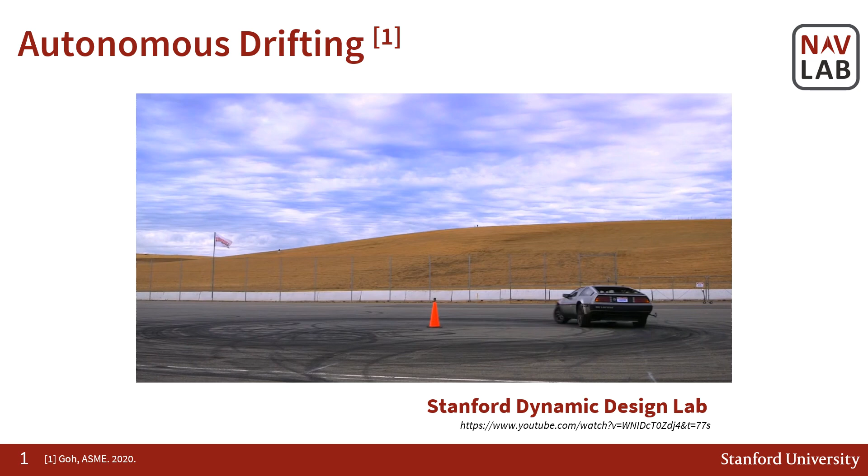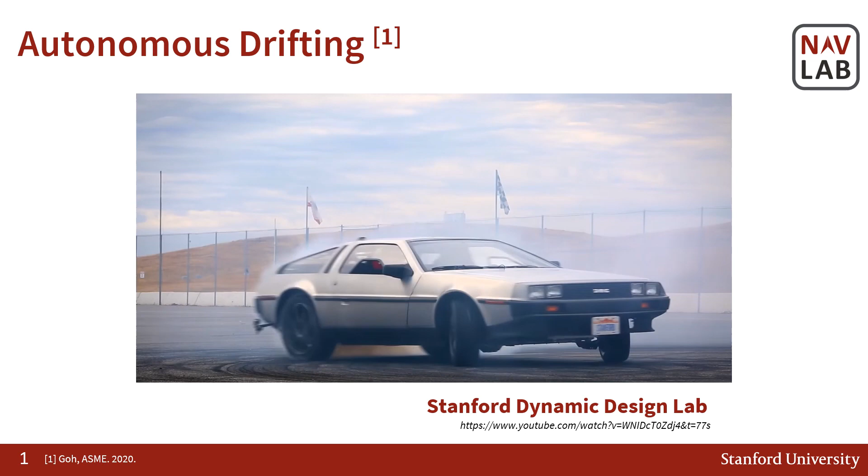Since I've mentioned autonomous drifting in the title of this work, let me start off by showing a demonstration of autonomous drifting. This demonstration was completed by our collaborators in the Stanford Dynamic Design Lab. The car is fully autonomous with a GPS receiver and IMU on board. While drifting is often considered only in the context of motorsports, it also lends itself to lessons in the larger context of autonomous driving.

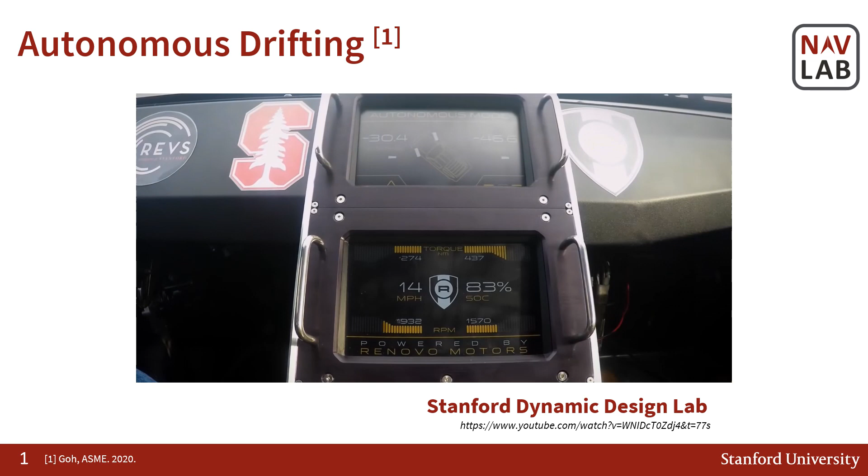Our overall goal is to ensure safety of autonomous vehicles under extreme dynamics. One such example of extreme dynamics is autonomous drifting. Drifting is a maneuver with extreme dynamics characterized by high side slip angles and slip of the rear tires. Sometimes it can accidentally occur in hazardous conditions, such as on wet or icy roads. Thus, studying autonomous drifting provides insights into safe navigation of autonomous vehicles in hazardous conditions that may compromise driver safety.

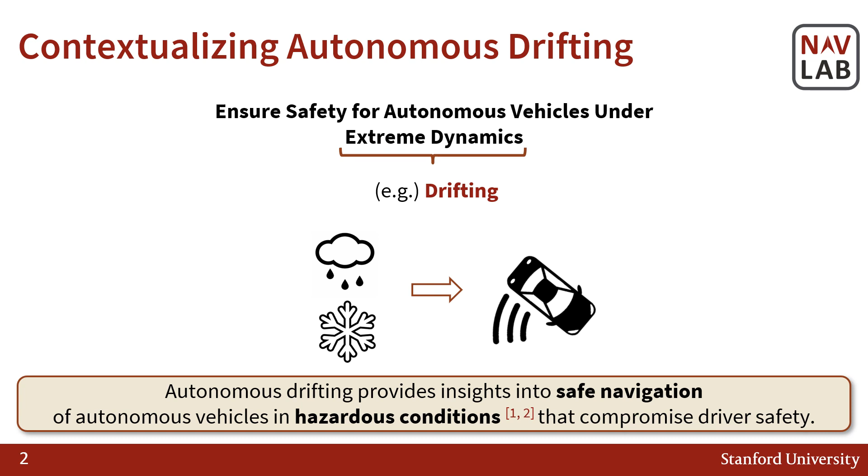This then leads us to our motivating question. In these safety-critical scenarios, where we might want to provide safety guarantees, from a navigation perspective, can we infer the worst-case estimation performance of our system under uncertainty? Now, what are the sources of uncertainty that we may be concerned about in autonomous drifting?

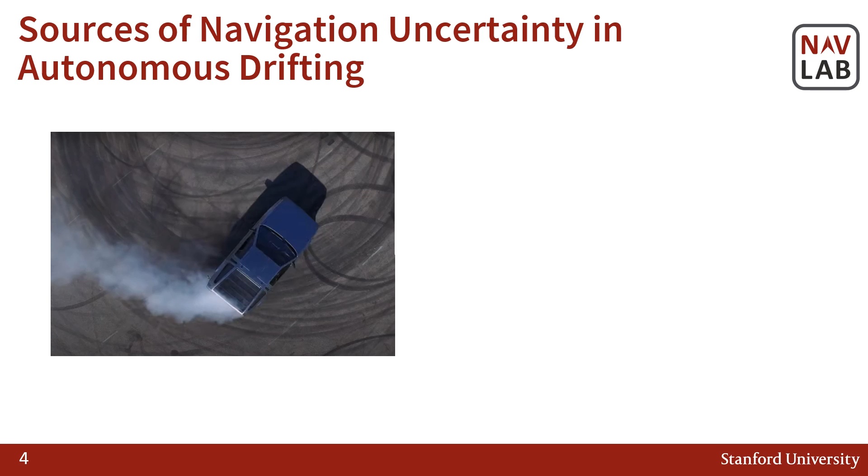To illustrate the sources of uncertainty that may arise in drifting, let us revisit our drifting demonstration. The car is equipped with a GPS receiver and IMU, which are subject to measurement uncertainties. Some common factors that contribute to measurement uncertainty are listed here. First, measurements are subject to noise from some unknown underlying probabilistic distribution. Second, we may experience communication losses. For example, the GPS receiver may lose connection with a base station, thereby causing losses in the base station corrections. And finally, the measurements may be subject to outliers or biases from environmental factors.

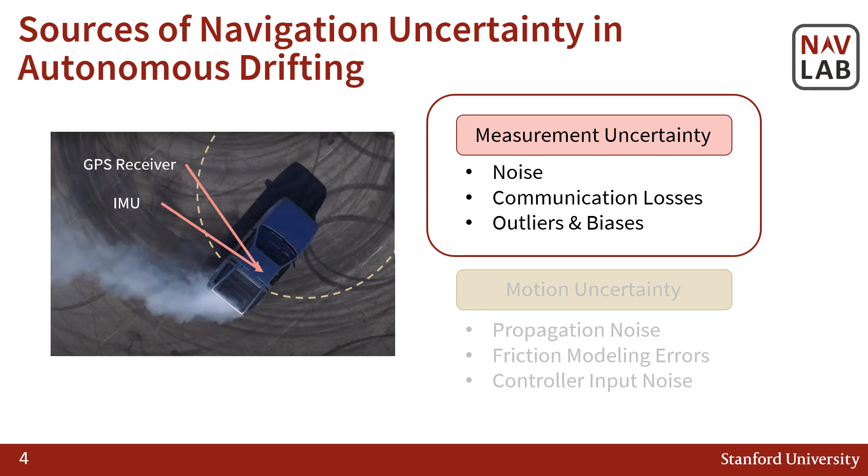In addition to measurement uncertainty, we're also concerned about motion uncertainty. As with all dynamic systems, drifting is subject to propagation noises. We also might be concerned with the modeling of the friction parameter between the tire and the road, as changes in this parameter change how we believe the car will move. And finally, there may be controller input noises. For this work, we focus on measurement uncertainty, specifically the uncertainty in double difference GPS pseudo-range measurements.

Now that I have framed the source of uncertainty we are concerned about, in safety-critical applications, it may not be enough to characterize the uncertainty. Rather, to provide safety guarantees, we would want to be able to bound the estimation uncertainty to inform the worst-case performance. And to do so, we use reachability analysis. To illustrate why, I'll highlight a few key differences between classic filtering techniques, such as Kalman filters, and reachability-based methods.

In traditional filtering, we receive a measurement, and we assume that the measurement noise follows a very specific noise distribution. Then, given the assumption on the noise distribution, the filter produces a current point estimate of the state and an estimation error ellipse derived from the covariance matrix. In this way, these classic filtering techniques provide likelihoods as measures of the estimation uncertainty, but they cannot bound the estimation uncertainty, which is less useful for worst-case considerations.

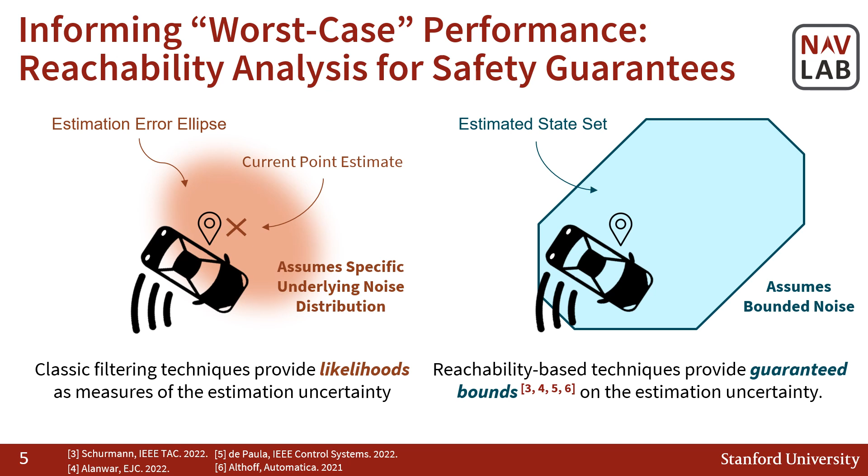On the other hand, in reachability-based estimation methods, given a measurement, and assuming that the measurement noise is bounded, without any additional assumption on the distribution, the method generates an estimated state set that is also consistent with the measurements and bounded measurement noise. Leveraging set membership properties, reachability analysis provides guarantees that your true state must reside within the estimated state set, thus also bounding the estimation uncertainty. As such, we investigate reachability-based methods for our worst-case considerations.

Then, while set propagation observers are generally found to be more computationally efficient than strip-based observers, strip-based observers were found to often provide tighter guarantees, meaning smaller bounds, than set propagation observers.

Furthermore, while set propagation observers have been demonstrated on bounding uncertainty for estimation with GPS pseudo-range, to the best of our knowledge, no prior work has applied a strip-based observer for bounding estimation uncertainty with GPS measurements and drift dynamics. For this reason, we focus on strip-based observers in this work.

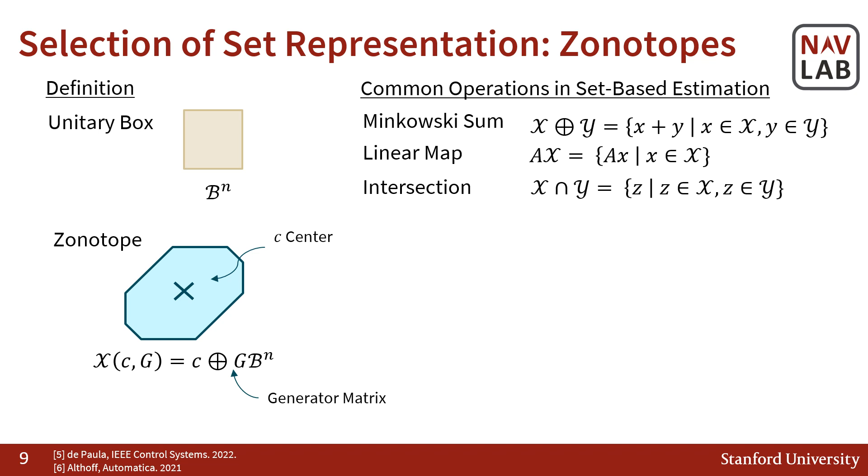Now, why do we want to use zonotopes? When dealing with set-based estimation, there are three common operations that we encounter, specifically Minkowski sum, linear map, and intersection, which are defined here. In the context of set-based estimation, we choose a zonotopic representation because zonotopes are closed under Minkowski sum and linear maps, meaning that for these operations, they produce less conservative bounds than other set representations.

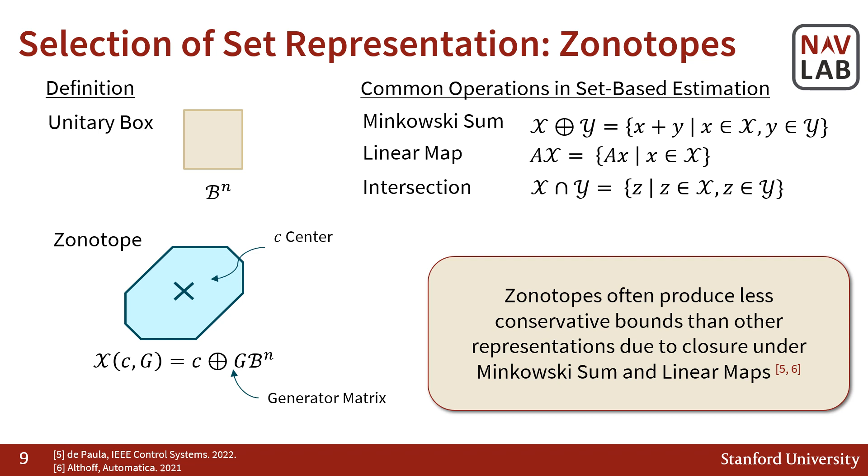Now that I've defined our set representation, I'll give an overview of the zonotopic estimation framework. The key assumptions of this framework are that motion and sensing uncertainties are bounded. Structurally, the framework is very similar to classic filtering techniques with a propagation and measurement update step.

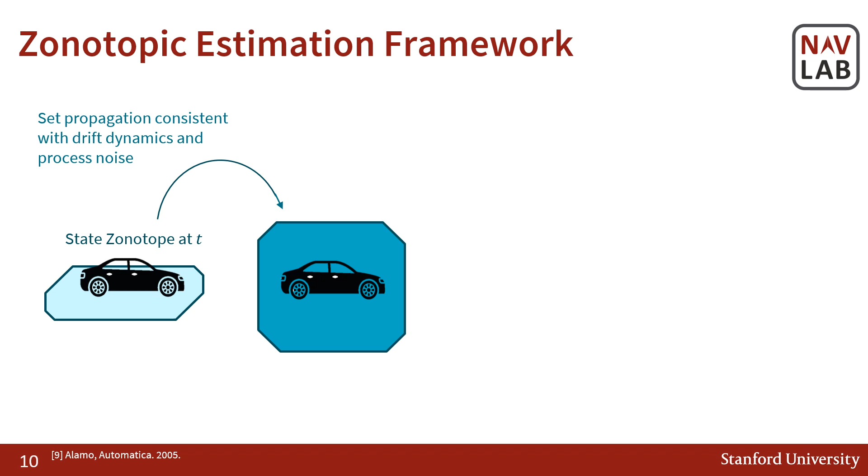Then we receive double difference pseudo-range measurements, and using the received measurements and measurement noise bounds, we construct a consistent state set. Then we assimilate the measurements by intersecting the prediction set and the measurement set. This is the measurement update. Finally, we minimize the volume of the zonotope to produce a final state estimate.

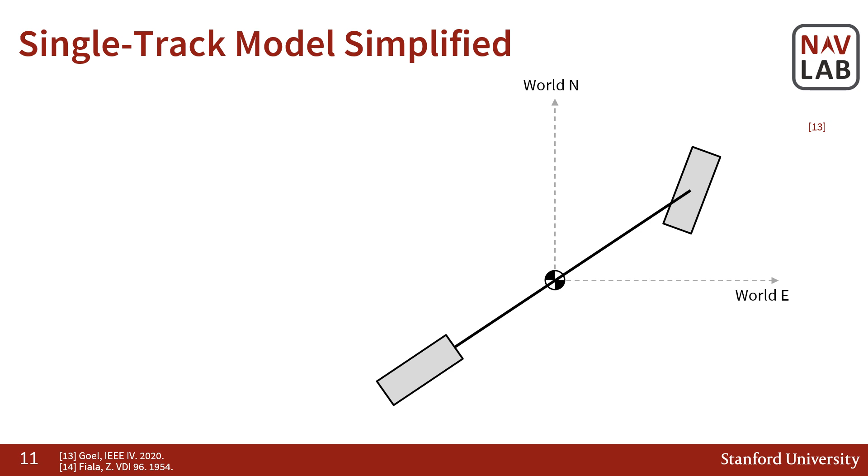The vehicle is controlled by rear tire force and steering angle inputs, where the steering angle controls the turn of the front wheel. The state that we are interested in estimating is position in ECEF relative to a base station, not shown here, as well as the body velocity in the lateral and longitudinal directions along the car.

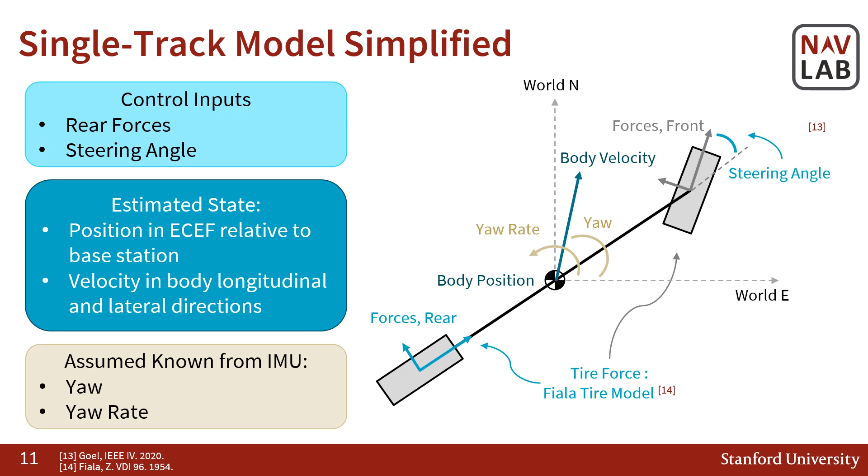The simplifying assumptions we make are that the yaw rate and yaw angle are known. We make these assumptions because we are concerned only with the uncertainty associated with the double difference pseudo-range measurements and not the IMU measurements.

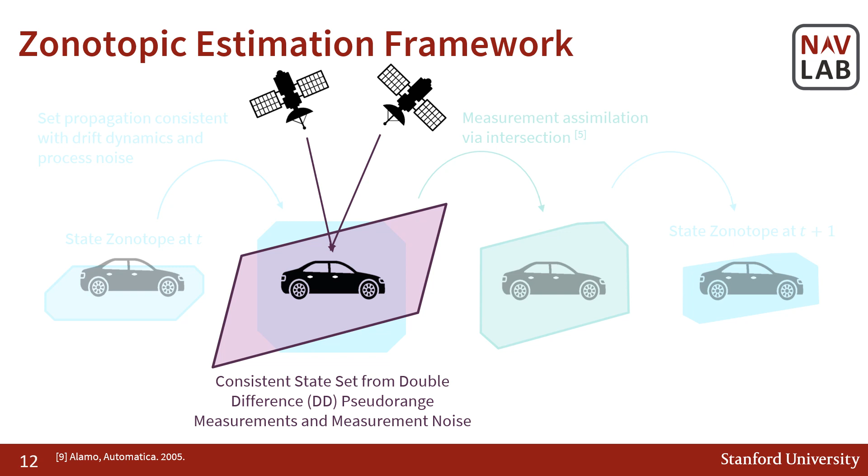We define the consistent state set as the set of states that is consistent with all measurements and the bounded measurement noise. Then how we assimilate these measurements with the state obtained through drift dynamics is by intersection between the consistent state set and the propagated set.

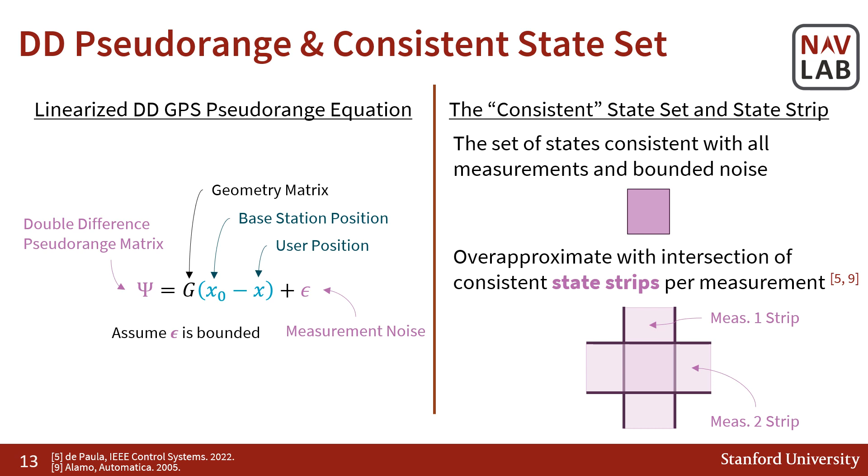In practice, the consistent state set is over-approximated by an intersection of state strips, where each state strip is created by finding the set of states that are consistent with one measurement. This is shown for a toy example here with two measurements. The approximation of the consistent state set is then shown by the intersection area highlighted here.

Now I will discuss our validation with simulation and real-world experiments. First, I will give an overview of what the simulation and real-world validations aim to address. Then I will dive into more detail for each of the two cases. Given that drifting is an example of extreme dynamics, we start with validation in simulation. Simulation allows us to validate the zonotopic estimation framework with different noise profiles, and we can compare the framework against multiple rollouts of a particle filter.

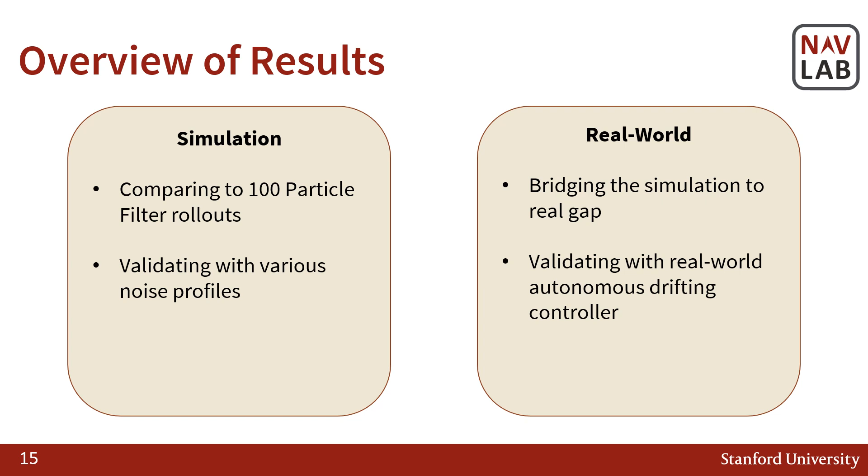Then we validate in a post-processing manner with the real-world collected drifting data as a first step to bridging the simulation to real gap. The simulation setup is as follows. We simulated a 30-second drift trajectory as shown in the video to the right. Then we simulated double difference pseudo-range measurements using a fixed satellite assumption. We added noise to the pseudo-range measurements from varying distributions and varying distribution parameters.

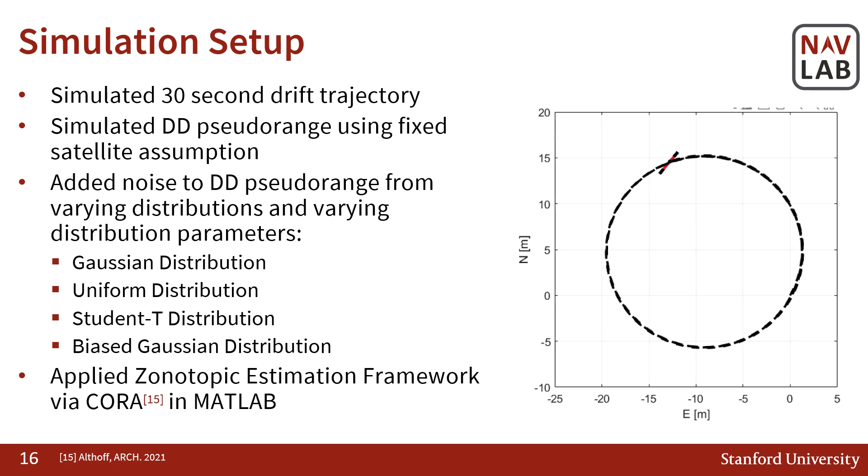The 4 distributions we investigated are Gaussian, uniform, Student-t, and a biased Gaussian. We varied the distribution parameters to vary the amplitude of the noise added. For example, for the Gaussian distribution, we varied the standard deviation from 1 meter to 10 meters of added noise. We applied the zonotopic estimation framework through CORA in MATLAB. CORA is an open source toolbox that is commonly used for reachability-based methods.

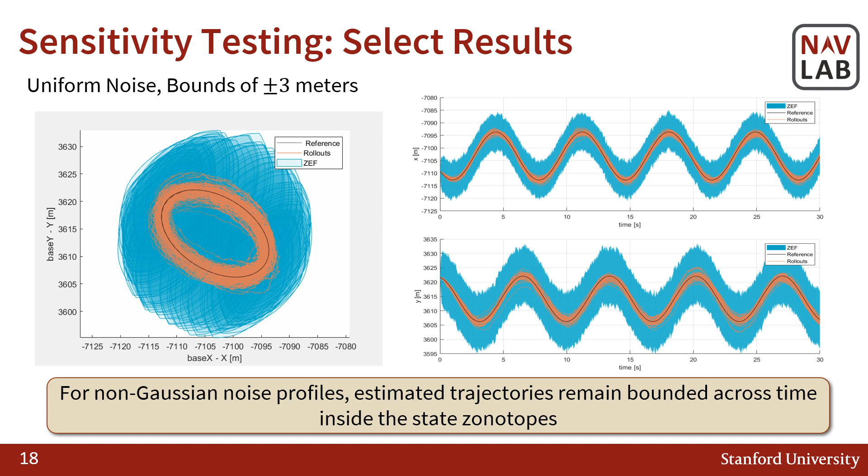These are results from adding noise from a uniform distribution with bounds of plus or minus 3 meters. To the left is again the xy plane, and to the right are the xy coordinates plotted separately across time. For non-Gaussian noise profiles, we found that the estimated trajectories also remain bounded across time inside the state zonotopes. Our real-world validation with the drifting data is currently in progress.

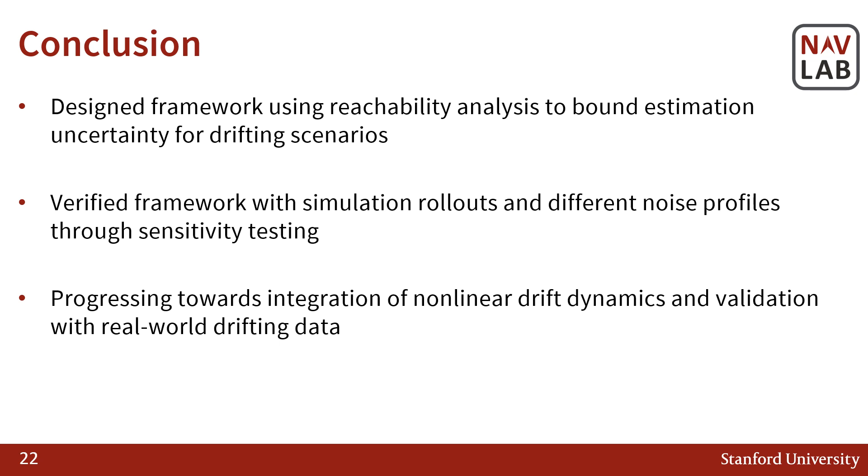Now I will conclude the presentation. In this work, we designed a framework using reachability analysis to bound estimation uncertainty for drifting scenarios. We verified the framework with simulation rollouts and different noise profiles through sensitivity testing, and we're progressing towards the integration of nonlinear drift dynamics and validation with the real-world drifting dataset.